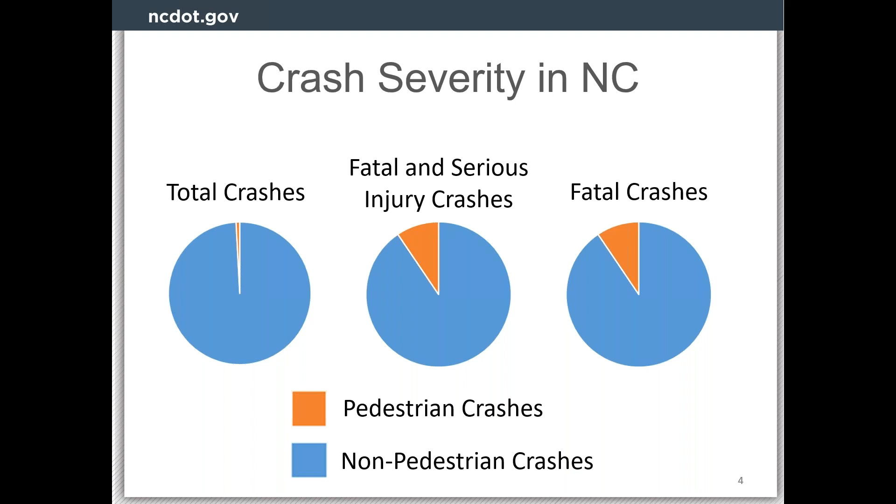So you really have to develop a special program to focus on pedestrian crashes. Considering the information I just shared, it should be no surprise that when we updated our strategic highway safety plan in North Carolina in 2019, the topic of pedestrian safety received a lot of attention, discussion, and strategies on the infrastructure side, as well as engineering, education, and encouragement. Today we'll talk more on the infrastructure side, but we did establish a goal of reducing pedestrian and bicycle involved fatalities and serious injuries by half by 2035, and move towards zero by 2050. So given the recent trend, this would be a significant undertaking.

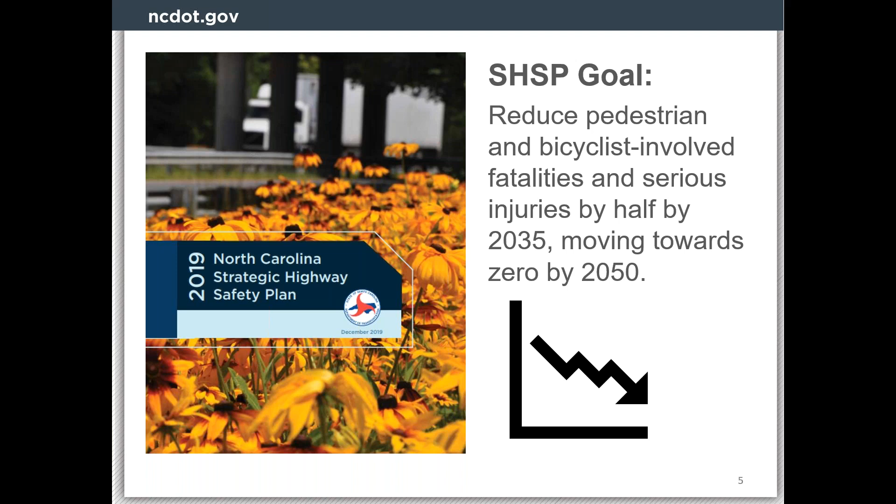The Highway Safety Improvement Program is the primary program in the state of North Carolina at the state level that is devoted entirely to safety on the infrastructure side. We have three primary focus areas that connect directly to our strategic highway safety plan: lane departure, intersections, and bike and ped. There is overlap between those three areas, especially between intersections and bike ped, and some between our lane departure focus area and bike ped as well. But bicycle and pedestrian safety has its own dedicated area of focus within our Highway Safety Improvement Program.

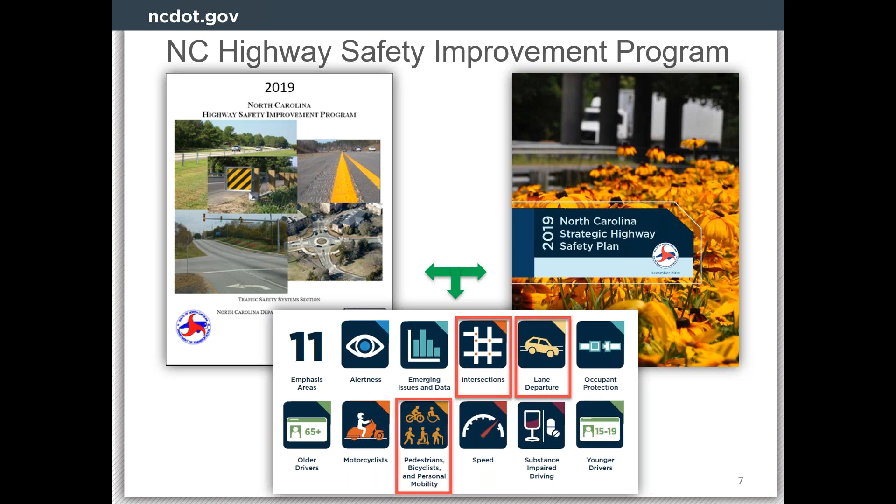Our pedestrian safety improvement program that's part of our overall HSIP has three main areas that we focus on. The hotspot is the typical one, the traditional one. It's very reactive, meaning crashes have already occurred. There's crash data present, you're looking at that crash data and reacting to it, investigating that location with that crash data as the primary reason for visiting that spot.

Corridors in North Carolina, our corridor program, combine crash data as well as risk data. They're very multimodal in nature. There's often transit in addition to bicycle and pedestrian and vehicle needs for those corridors. Some of those can be very, very complex as well.

And then the third area is a relatively new area that we've added to our program that gives us an opportunity to really identify and focus with a lot of cities or large areas that are overrepresented in pedestrian crashes and fatalities. This gives us an opportunity to really scale the data and analysis as needed for that area. Instead of looking at the state as a whole, we're able to focus on a particular city and use a lot of data and information to help develop a work plan that may make good sense for that area. We'll go through these in a little bit more detail.

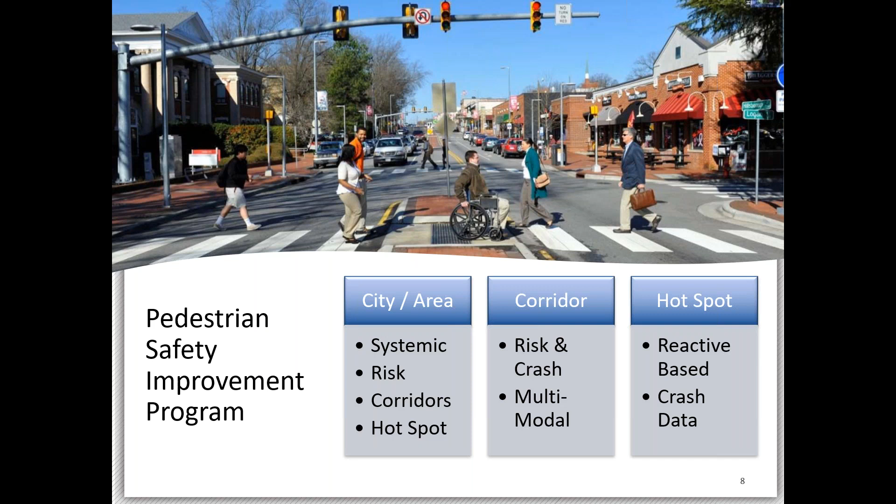Hotspots, again, very, very reactive - it's crash data based entirely. So they're going to show up in your population centers, where you have population density and a lot of exposure, at universities and in urban areas. They are useful, they do bring attention. If you have a location that has experienced a lot of pedestrian crashes, it should be reviewed. However, the data is limited and you definitely need to supplement the crash data with other risk data to get a more complete picture.

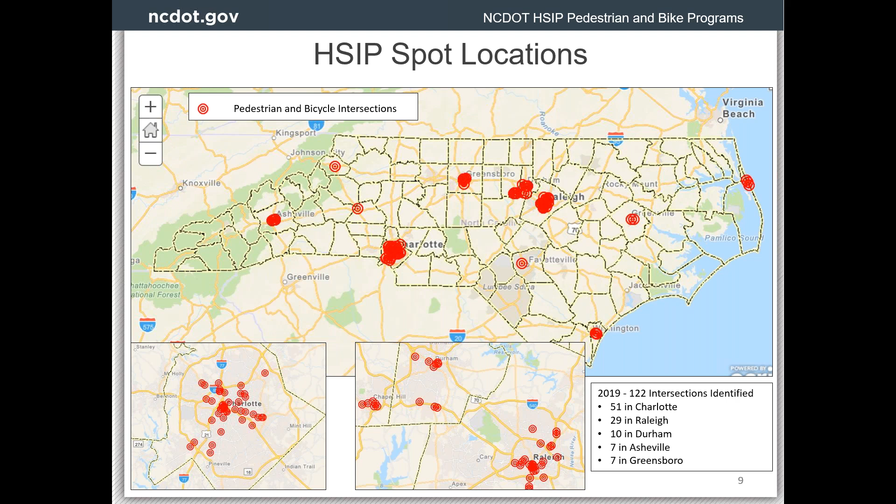Pedestrian crashes move around a lot. They may be in one intersection one year and a different location the following year. So this is limited, but it is still part of our work plan. In addition to the HSIP reactive locations, we get a lot of requests from cities, from universities and school systems, the public, and from our review of fatal crashes. Those are typically spots as well, and they are typically reactive in nature. So those requests are also handled as part of our hotspot program.

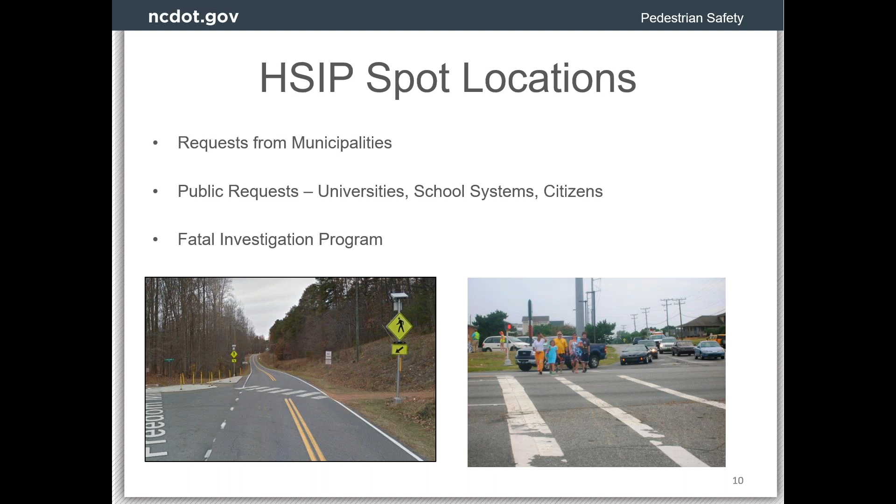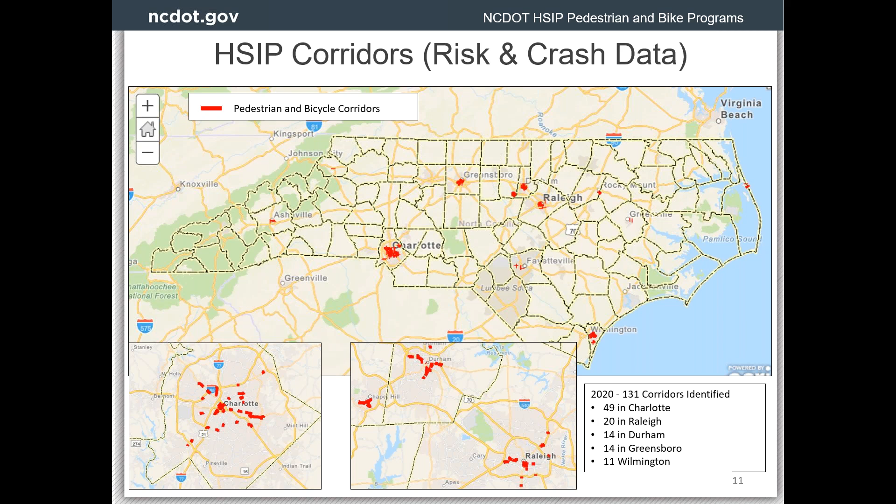Our HSIP corridors, like I mentioned before, use risk in addition to crash data. They are still focused heavily in our urban areas. They can be anywhere from a half mile long to maybe up to 4 or 5 miles in length. They are mainly arterials, very complex, with transit and multimodal needs. They may have higher speeds, much higher volume, and often have a series of issues in terms of high-risk intersections and sections in between that definitely have a lot of specialized attention.

The corridor risk scoring that we use in North Carolina still uses crash data, but it's minimized in its ability to affect the score. Roadway factors like speed and crossing distance, volume, signal spacing, and sidewalk presence are used, as well as different demographic or census type data such as land use, population density, and vehicle ownership. This is an evolving area. A few years ago this was not in place, and I'm sure in a couple years this type of risk scoring will continue to evolve as we learn more about it.

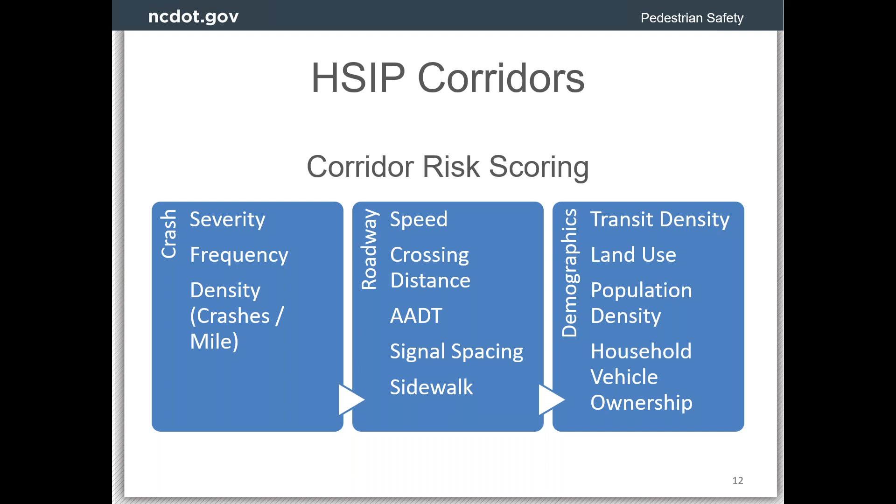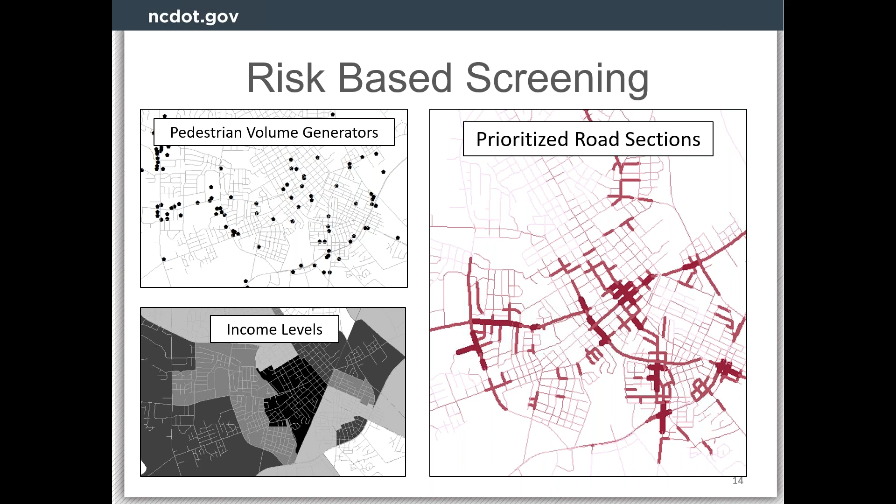With these cities, this is an area we're looking to continue to develop. We'll spend more time this year working with a few mid-size cities, which allows us to adjust the scale of our safety planning and use different risk-based screening methods. These factor in pedestrian volume generators such as stores, restaurants, and schools, but also census data such as income and other factors, so we can assign a risk score to various roadway segments, engage that city, and bring our HSIP program and low-cost countermeasures to fully engage them in our processes.

With safety planning, there's a lot of data available, a lot of information. We just went through the reactive hotspots based on crash data. You can identify corridors using risk analysis and various information. There's small areas in cities, a lot of local government requests, and a lot of interest in pedestrian safety. So it's very easy to generate a lot of choices for your program.

As you wade through that information and start shifting to, well, now we need to deliver, we need to implement things as quickly as we can. We need to get information to the right people at the right time so we can develop projects and get those on the street. So program delivery is a very important thing we focus on in North Carolina as part of our efforts.

Basically, we have three guiding principles that guide our program. We want our projects focused on reducing fatalities and injuries, not just total crashes. They need to have a focus on those most severe events—that's what we want our program to have the biggest impact on.

We want to maximize value, so we want to focus on a lot of low-cost countermeasures, which aligns well with the STEP program. Most of the countermeasures Becky mentioned at the beginning are very low cost and can be implemented without a lot of constraints. That leads to the third principle: we want to get safety projects on the ground, built quickly, delivered in a cost-effective manner. The best safety dollar you can have is not one that's in the bank, it's one you've already spent, so that countermeasure has a chance to work.

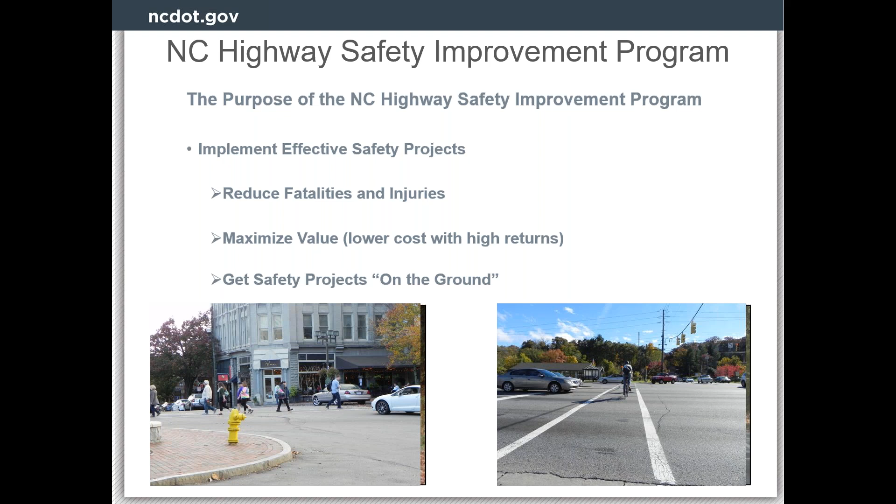We develop work plans off of the hotspot list, off of corridors in the city focus areas, and field staff are assigned field reviews continuously. These reviews are done with local government staff as well as other NCDOT staff. So if we're identifying locations inside city limits, that city is going to be part of the field review.

This is not a 2-year or 4-year cycle. By having, in North Carolina, a quarterly project selection and funding process, if you become aware of a problem tomorrow, a pedestrian safety issue at an intersection or mid-block, and you have a solution for it, there's an opportunity for that project to be selected for funding quickly, within 3 to 6 months. It can be funded, then move on to design, let, and construction.

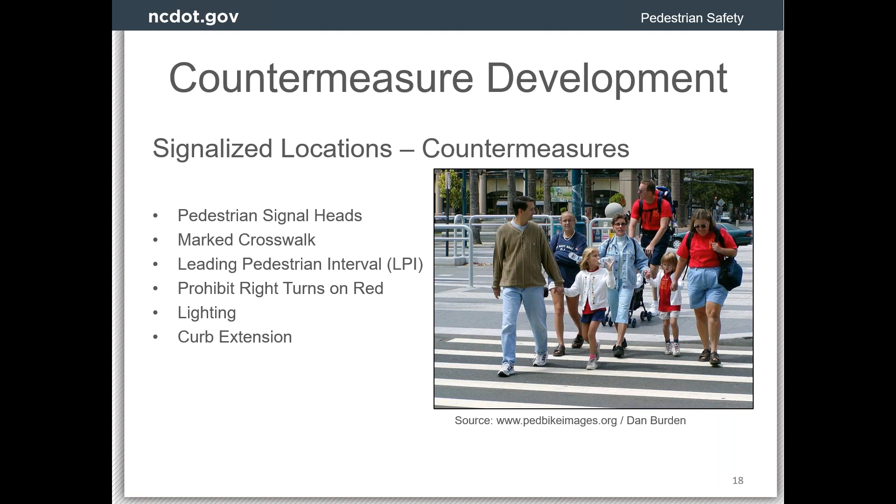That's one thing we also do with our program: try to identify gaps where maybe we have countermeasures that exist but aren't being used to a great extent, or countermeasures that are new and untried. We typically work with different cities and locations to get those implemented and evaluated, so we can broaden their use across the state.

At uncontrolled crossings, again, a very familiar list — these are the ones we typically focus on: crosswalks and refuge islands, hybrid beacons and RRFBs. We will do traffic signals; pedestrian traffic signals are not uncommon, and we'll do that when it makes sense. And of course, lighting and curb extensions as well.

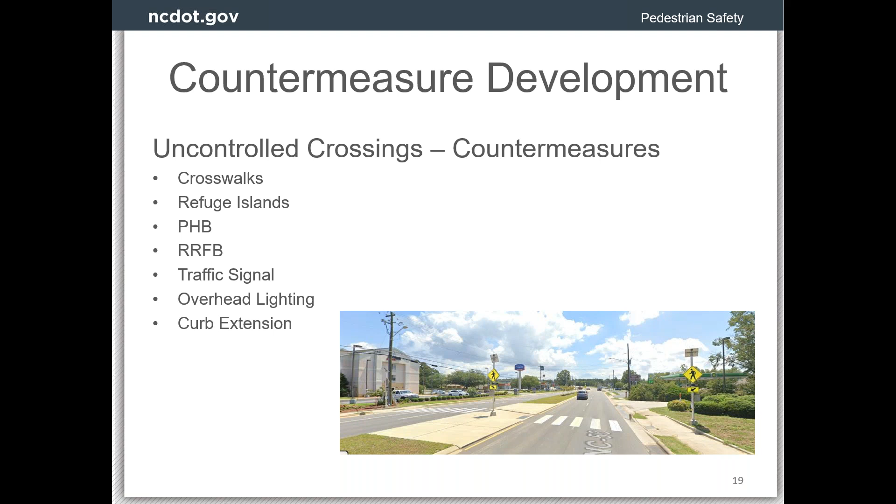I'm going to take a few minutes and step through a case study on a corridor. This is NC 54, in central North Carolina in the Chapel Hill area. This is one we partnered on with the town of Carrboro and Chapel Hill, and our consultant VHB. This was an interesting corridor.

Like a lot of our arterials, it's very complex. Traffic volumes range from 20,000 to over 40,000 vehicles per day. It's an expressway, with interchanges in the middle and at-grade locations on either side. You have apartment complexes spread throughout the corridor that are somewhat landlocked, and many people living there are very transit dependent. So you also have bus stops all up and down the corridor where people need to cross the expressway to reach their desired bus stop.

Certainly this is a location we did not flag based on crash data — fortunately. There are surprisingly few pedestrian crashes along this corridor, but the risk is quite high.

One of the key things we asked ourselves at the beginning of this project was: how do we take and acknowledge the various transportation plans that already exist in this area? How do we combine that with today's data — exposure data, crash data, risk data — and then develop and implement solutions for tomorrow?

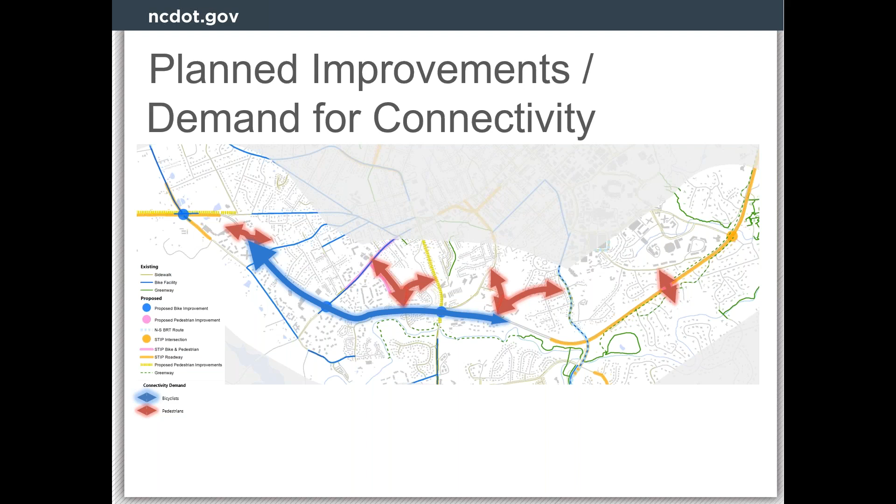This was a little bit of a different process because of the complexity of the corridor. When you look at what the cities and towns have already looked at in the area, there are greenway plans, pedestrian plans, sidewalk plans, other capital improvement plans — a lot of knowledge that can be gained from those plans that we need to be aware of as we implement various low-cost solutions.

So even though we want to get our solutions on the ground as quickly as possible, we need to step back and see what knowledge we can gain from the long-term plans already developed, so that as we implement safety improvements, we're doing so in a way that supplements the work already done and the work planned for the future.

This was very useful to figure out where people need to cross, where we can improve crossings, and where we can plan for future crossings along this expressway. This was a good example of a corridor program, and one that will help us further establish our corridor program in the future.

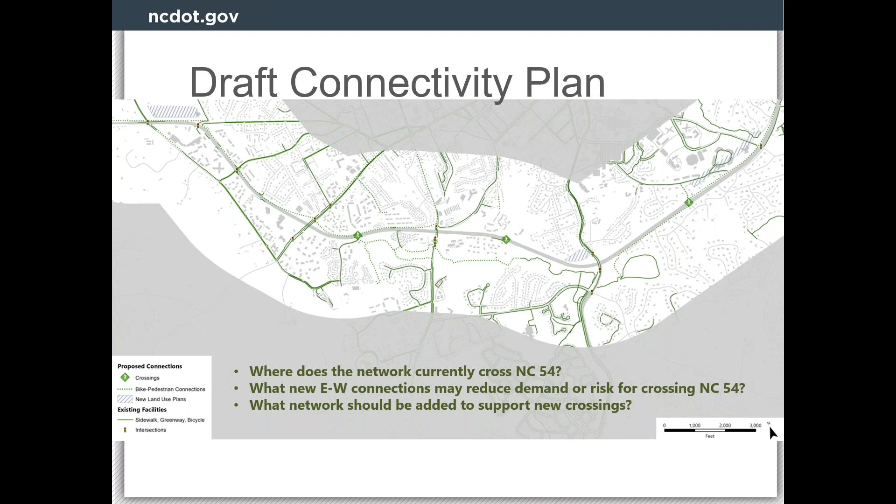In addition to working with the cities and incorporating their plans, we did work with them on public workshops as well. We used the public to help validate some of the data and information, and also to receive their perspective. As we moved through the project, it gave us an opportunity to use the public to validate our recommendations, and we found that to be a very beneficial step.

In the near term, this project was able to identify many low-cost improvements: signal phasing improvements, whether it was split side street phasing or LPIs, signs and markings and visibility improvements, refuge islands and crosswalks were a common recommendation.

One thing about this is we were actually able to implement some of those while the study was ongoing. It became pretty apparent at a few intersections that there were several low-cost improvements we could do, so we didn't even wait for the project to finish. We went ahead and used our HSIP program to implement those changes while the study was still going.

That's one way to continue to build relationships with the public and with the local governments. When they can see how things can get done and how things can change, it helps build that support for the overall project.

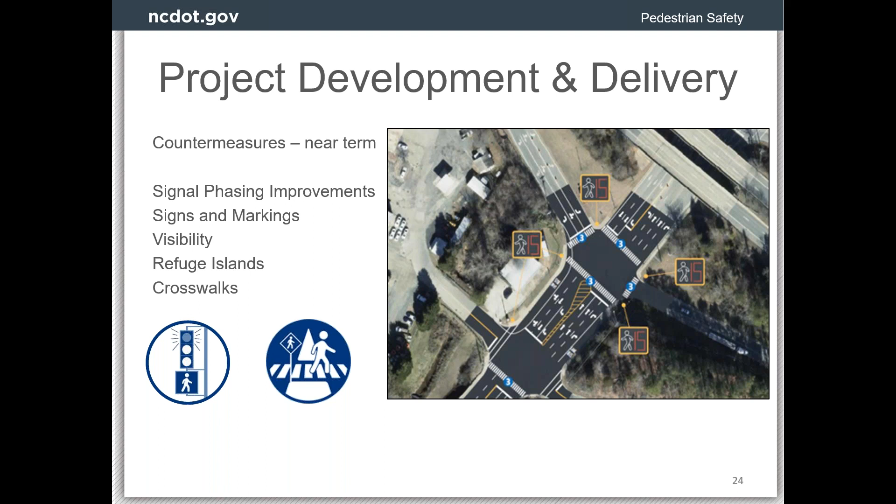There are more complex countermeasures as well that came out of this study, including changing some of the access control, more complicated pedestrian signals and/or hybrid beacons, and a couple areas around some interchanges that may have some road diets. Those are going to take a little bit more planning and design, so they will take a little bit longer to implement.

But with our program cycle, the way we have it, even these midterm projects will be able to compete for funding within the next 3 to 6 months. That will allow them to go on to the design and construction phases much quicker.

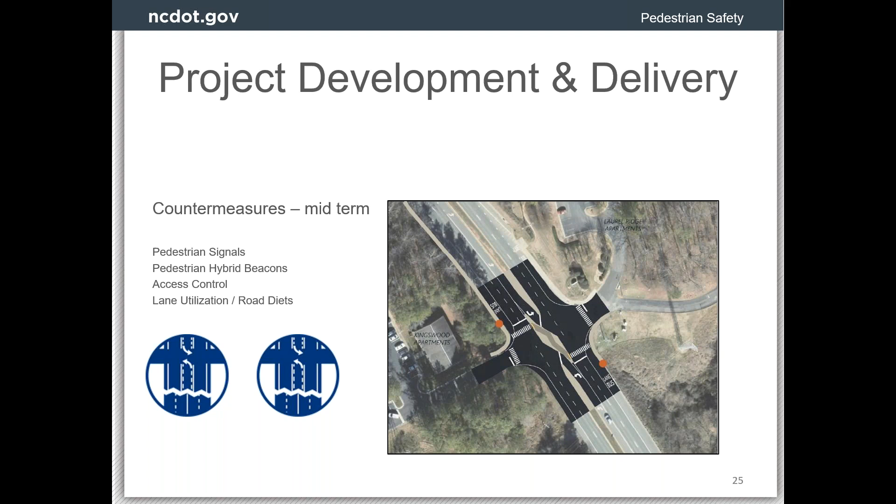A different case study that I wanted to share is in the city of Fayetteville, and this one has some history to it. And it's not all good. Unfortunately, this was one that we learned a lot about to help us improve our programs.

This started off as a reactive based hotspot investigation. There were 4 pedestrian fatalities in a fairly short period of time, occurring back in 2010 through 2013, back when our entire program was reactive. So we were not investigating very many locations until after the crashes had occurred, and that was certainly the case on this corridor — 4 pedestrian fatalities.

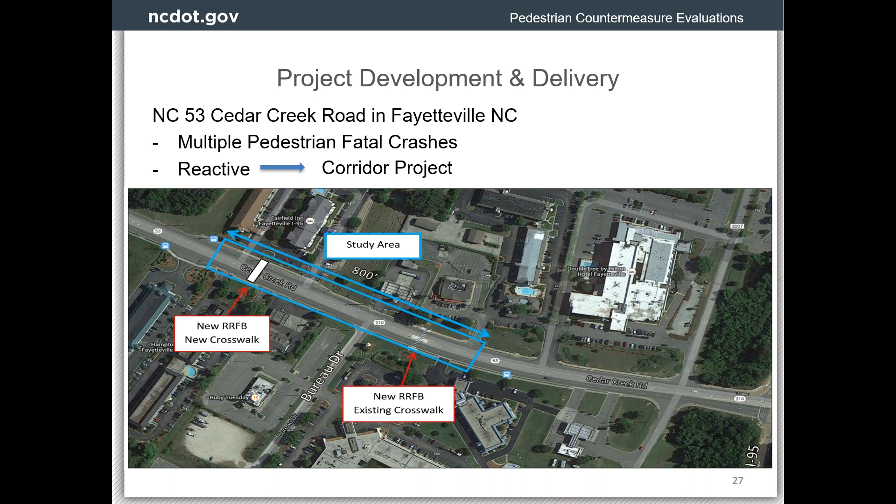We turned it into a corridor project after realizing that much more was needed. We were able to develop a lot of interim solutions that we were able to deliver quickly. We installed a couple RRFBs in 2014, about 500 feet apart. But one of the key things that came out of this was to do a pedestrian road safety audit, knowing that we weren't solving the entire problem of this corridor.

You can see it's a wide road, a 5-lane road, with a lot of commercial development. Some of the sidewalk is immediately behind the curb, very close to the roadway. We knew that the immediate reaction we did would be helpful, but it would need more thought. So we did the interim solutions, delivered quickly, but moved into a road safety audit so that we could bring in a lot of additional experts to take a closer look at the road.

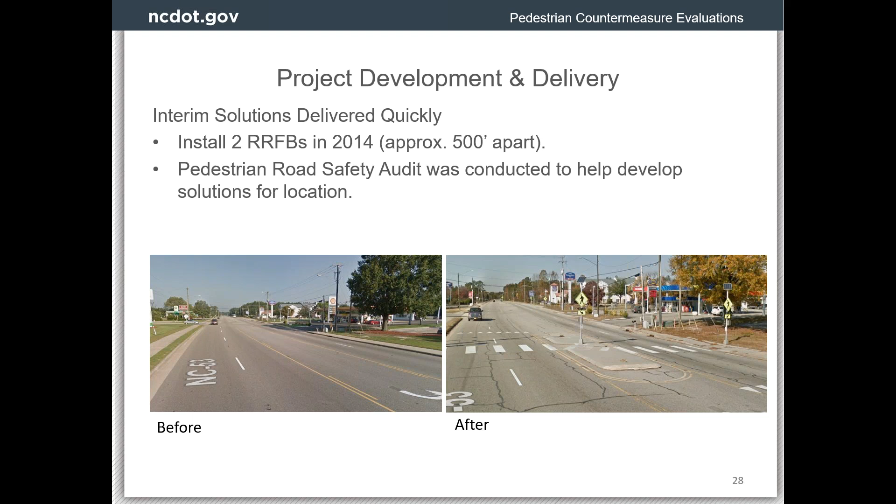We had the 4 pedestrian crashes in the 3 years prior to the RRFBs. Fortunately, we have had none since then, and we continue to monitor this location. Most of the fatalities and pedestrian crashes along this corridor were from out-of-town senior citizens and occurred from 7 to 9 p.m. at night.

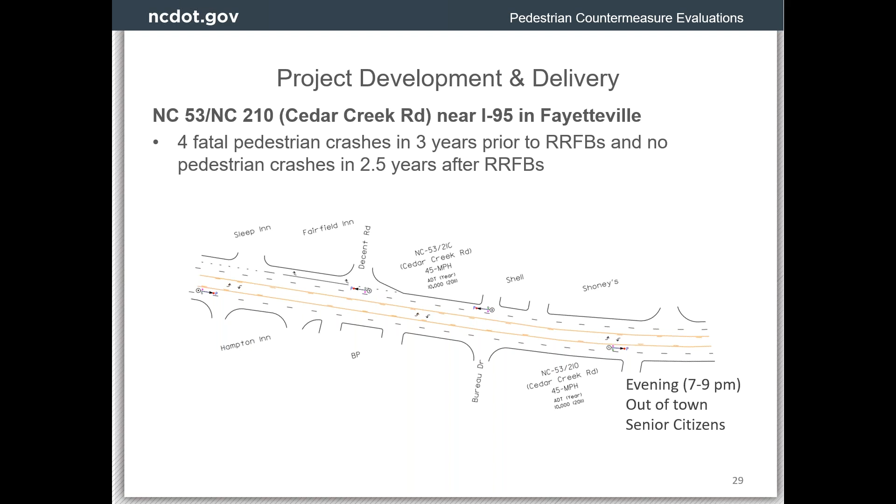This is an interchange on I-95, which runs up and down the East Coast, so you have a lot of travelers stopping at this area. It's mainly a mixture of restaurants and hotels. People were parking at the hotel, not wanting to drive anymore, and were crossing the road to go to their restaurant for the evening meal. That's what was leading to most of these fatalities.

We did a lot of collaboration with the city of Fayetteville. They helped us improve lighting along the corridor, helped hold public meetings, and do a lot of outreach as well as a lot of education on the RRFBs. That was very beneficial.

One of our goals is to have effective safety projects, and oftentimes with pedestrian treatments, in order for them to be effective, there is an education component that needs to be done to let the public know what you're doing, and in some cases you have to educate them on how to use the device too.

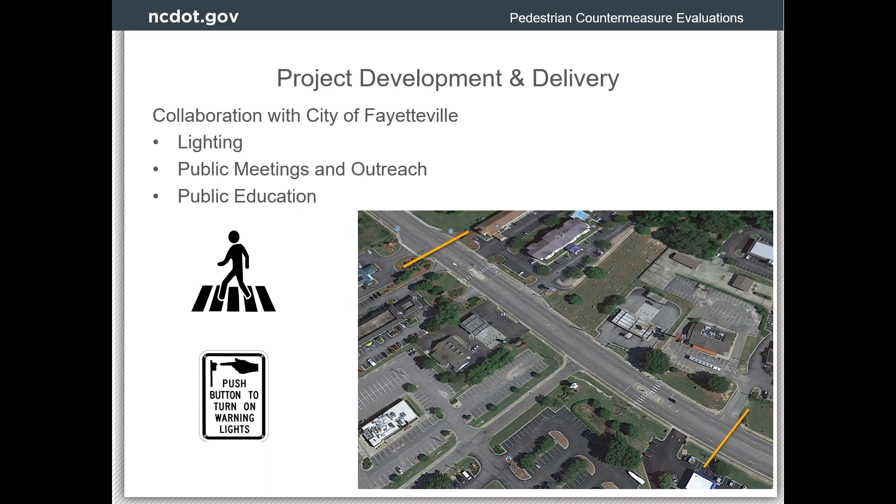This corridor looks different now because, as a result of the road safety audit and collaboration with the city, we decided to use our HSIP program to continue addressing risk along the corridor. Even though we had no pedestrian fatalities after the initial RRFBs were installed, the risk level was still high. We installed a median for about 1.5 to 2 miles, so it was no longer a 5-lane section. We added many more RRFBs throughout the corridor, and improved lighting, bus stops, transit, and sidewalks up and down the corridor. So it looks very different now.

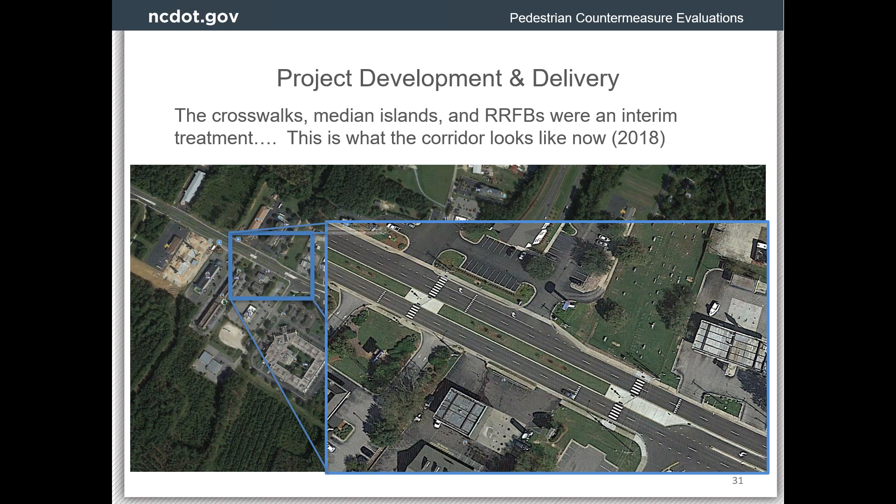This was also done through our program, and we knew it would take a lot longer to implement. But it was important to get the low-cost treatments in place early while we waited on the more expensive project. Again, you can see additional RRFBs up and down the corridor.

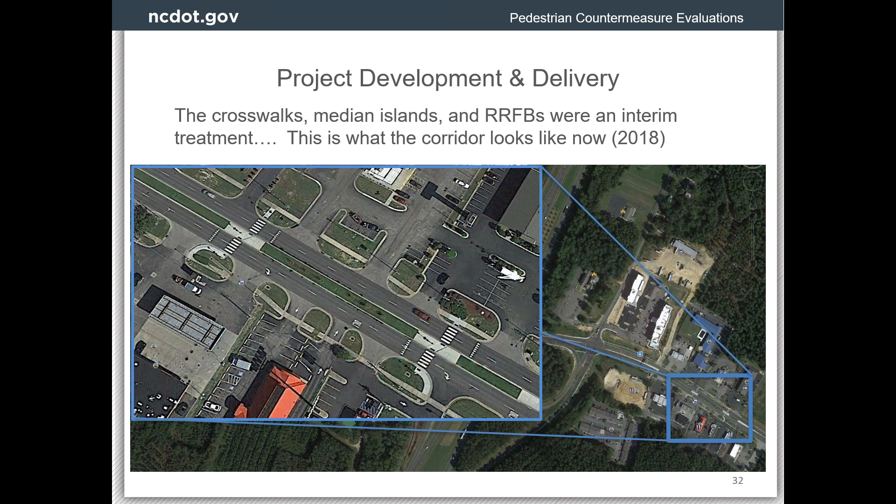One thing we learned from this was that initial use of the RRFB was somewhat low in terms of pedestrians using the device as intended. But we quickly realized that as we added more and more RRFBs on this corridor, pedestrian compliance went way up. That helped us consider that we needed to look at corridors from a more complete perspective, not just as a series of spots, so that all of these fairly low-cost improvements can work together. Again, that's some of the additional improvements that took place.

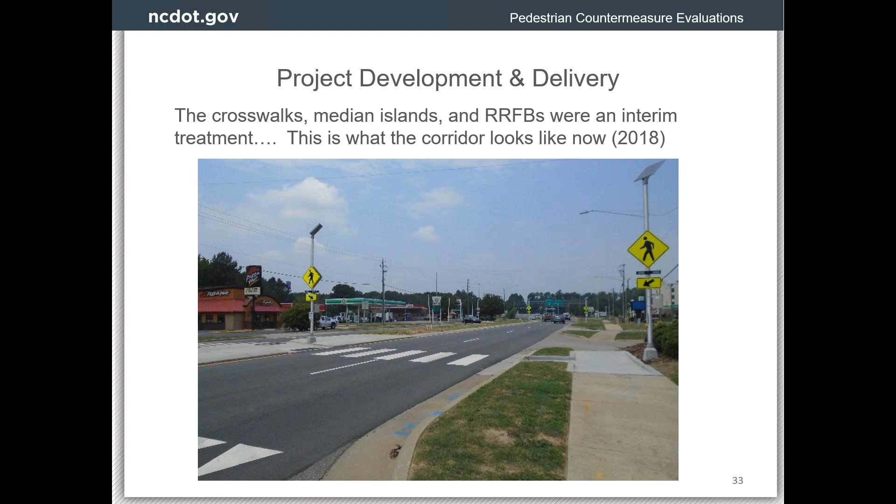One other study I wanted to briefly mention was our downtown Raleigh pedestrian safety study. This is an example with a large area. Part of our program is focused on identifying mid-sized and large cities to work with to improve pedestrian safety. This was a partnership with the City of Raleigh and our consultant VHB, covering a pretty large area - around 50 blocks, I think over 70 intersections. This is the state capital of North Carolina, includes the state government complex, and we were asked to do a study to improve pedestrian safety where there's a lot of state employees in this area, probably over 20,000.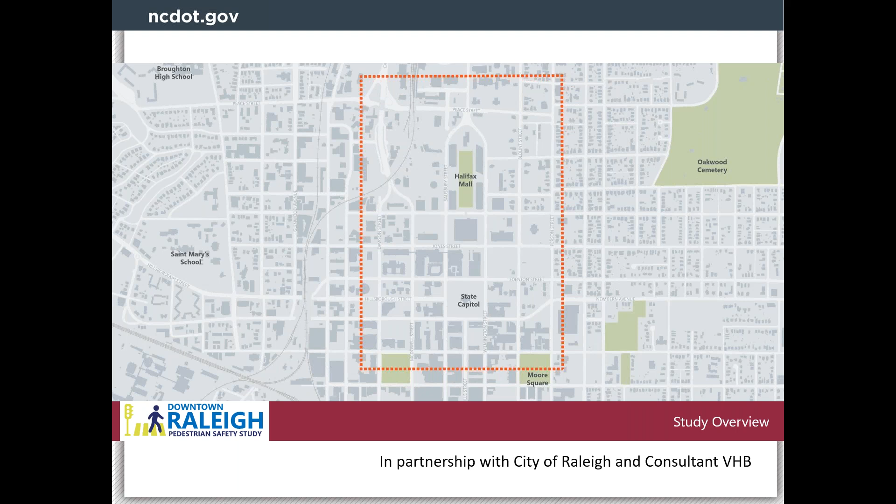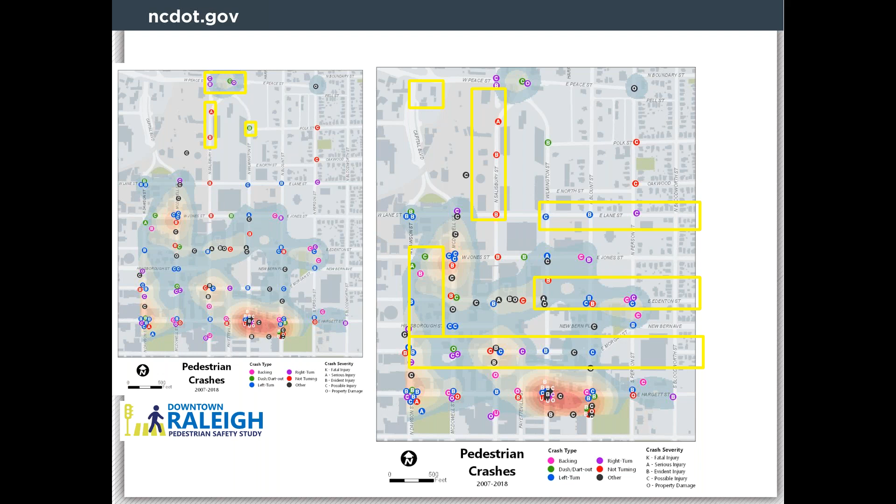It was certainly challenging because of its size and scope, but the methods remained similar - we used crash data and risk data, a lot of public outreach, getting information from people who live and work in the area, which helped validate and supplement our data-driven processes. This study is still ongoing, not quite complete yet, it's almost complete. But one of the more rewarding things that happened as part of this project so far was

we were able to work with the City of Raleigh to go ahead and start implementation of things while the study was ongoing. That whole concept - if we have problems identified and solutions to those problems, what can we do to get those in the ground quickly? So while this project has been ongoing, the City of Raleigh has been able to implement LPIs in a broad area. In addition, we worked with the City of Raleigh to come up with a plan to help manage speeds in the downtown area with the signal system, making adjustments there, which is still ongoing. That's not complete either, but it was another example of using data-driven processes to help us prioritize and get information in place. As soon as you have the problem identified and solutions in place, you develop those processes to make sure something can get implemented sooner rather than later.

Jed's going to talk a little bit more about this overall project, so I won't say too much more on that. But with that, Dan, that's

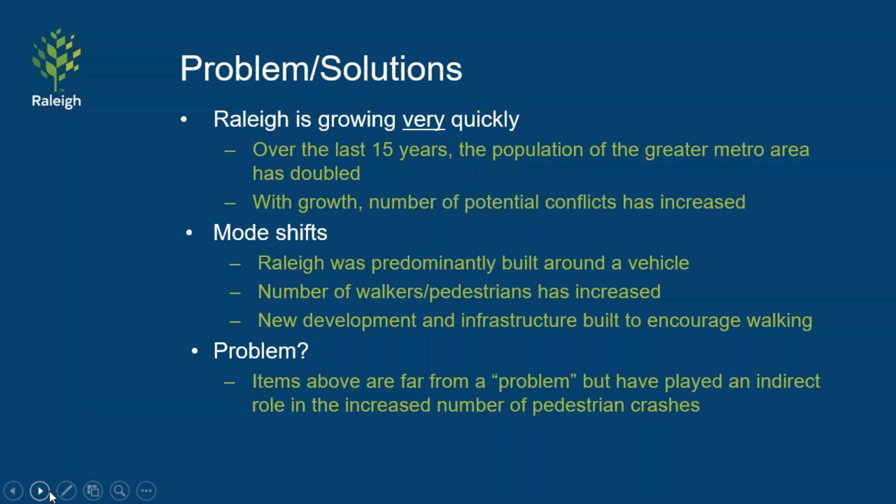So one good thing is FHWA and NCDOT have always done a good job of coming up with solutions. The Spectacular 7 were talked about earlier - as Brian alluded to, we kind of have our own toolkits. Prior to this was the first time I'd heard them called the Spectacular 7, but needless to say, they're very good tools we can apply to problematic locations where we have conflicts occurring.

As with anything, solutions can come with problems or issues. As I mentioned earlier, governments have their own issues, so to speak, and funding is always one of them. Funding isn't always prioritized in necessarily the way safety folks would want. Some of the other things is change is not always welcome.

I know internally here in the state of North Carolina, and specifically Raleigh and a couple other municipalities, pedestrian hybrid beacons, or hawks, there was a fairly high reluctance to use them. Engineers were fearful that people wouldn't understand them, not know what to do. We installed a few, and we had some CCTVs, and some of the driver behavior was a little comical to watch, but the pedestrians using them - it was very intuitive, and drivers have since adapted.

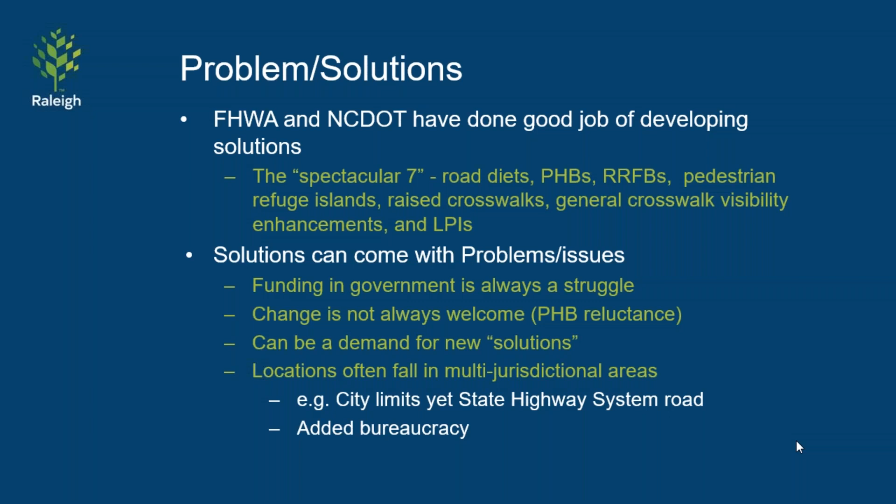And then the last thing is, in Raleigh - I suspect it's similar for other states and jurisdictions on this call - multi-jurisdictional areas. For example, the state highway system is very large in North Carolina, and the majority of the larger roads in Raleigh fall on the state highway system, yet they fall in the city limits. So getting something done can take a little bit longer - it's just a little bit more added bureaucracy.

As I mentioned earlier, government has limited funding, and safety projects are not always - for those that work in the safety industry, we always feel like we're underfunded. It seems the shiny new capital projects or state improvement projects are the ones that get the bulk of the funding. To put that in perspective, every fiscal year my programs get about $500,000 for safety type projects, which could be RRFBs, things along those lines. But capacity and streetscape projects every year is probably in the $20 to $40 million range.

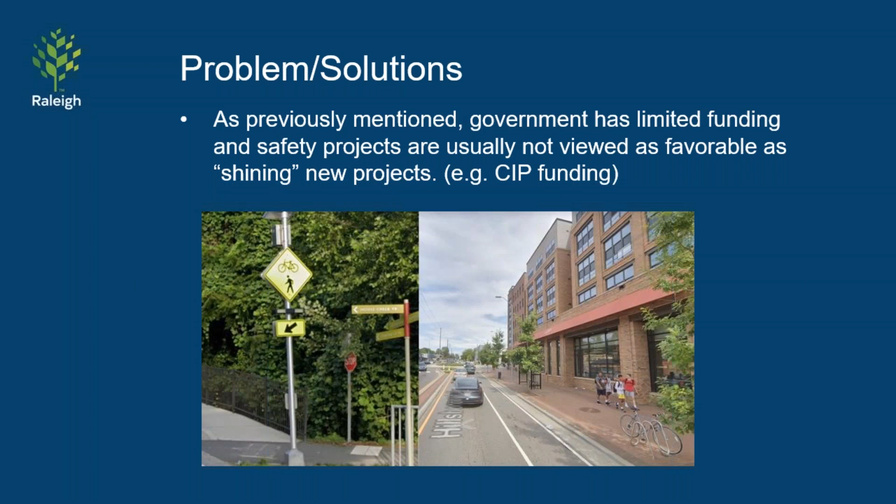I'll give you our take, City of Raleigh's take, on some of the reasons we've had success. Brian mentioned this: working together, you achieve more. Throughout North Carolina, and I suspect for other jurisdictions and states on this call, relationships between locals and states can run the gamut from great to not great. The good news is a while back we started interacting closely with DOT under the idea that working together we would achieve more. The taxpayer doesn't see the difference between state, local, and even federal. They just know they pay taxes at the pump and want improvements. So we've achieved a significant amount of improvements working together with the state. That's something I can't stress enough.

The other thing is careful consideration for countermeasures. One size doesn't fit all. Brian alluded to this: sometimes there's a long gap between having a solution and getting it out there. I'll go over an example. One size doesn't fit all, and sometimes you have to do interim measures.

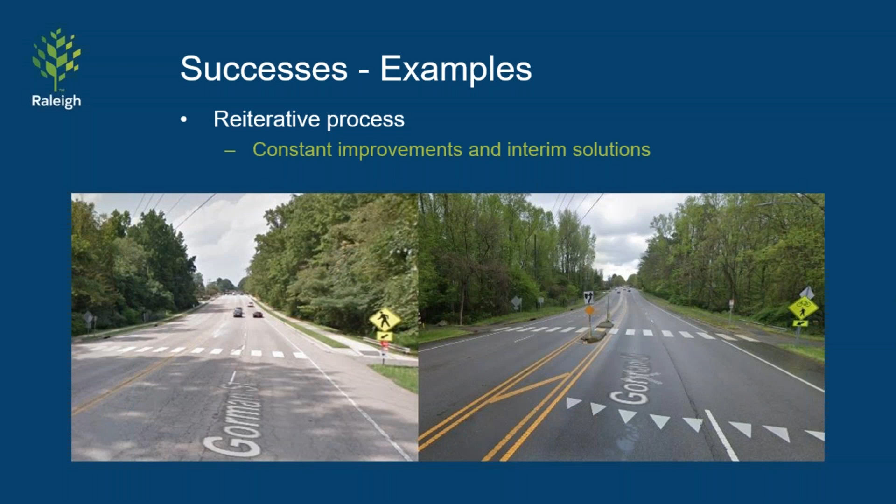So what we recently did is we ordered a slew of RRFBs to install at these locations as interim solutions until the more permanent solution, a Hawk, gets installed. The RRFBs, once the Hawk goes in, can be repurposed to other locations. Again, this is one where with the Spectacular 7 you've got to use them all based on case scenarios.